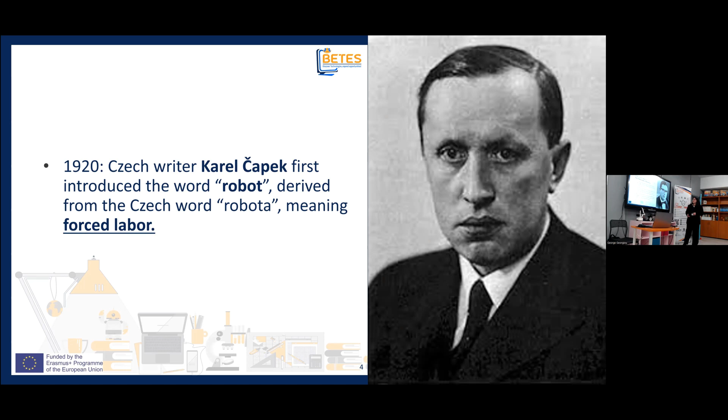The second person, also an author and writer, is Isaac Asimov, who in 1941 introduced the 3 laws of robotics.

The first law is a robot may not injure a human being or, through inaction, allow a human being to come to harm.

The second law is a robot must obey the orders given to it by human beings, except where such orders will conflict with the first law. So they will do whatever we tell them to do unless it will harm a human being.

The third law is a robot must protect its own existence as long as such protection does not conflict with the first or the second law. So it will have a mind of its own, it will protect itself, but again, it will follow the orders and not bring harm to a human.

These obviously were laws made by a writer. It doesn't mean that they are actually applied yet to robots.

Here we can see the 3 big waves of robotics. From 1940 to 1970, we have the initial development of industrial robots. The second wave, we have advances in computing and sensors. And third wave, we have the introduction of artificial intelligence, advanced sensors, and advanced machine learning.

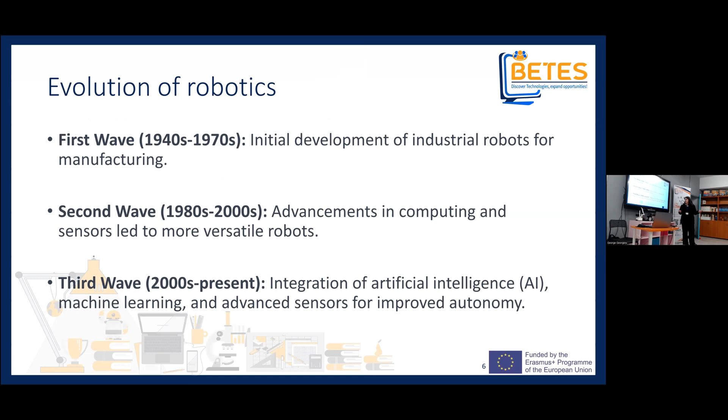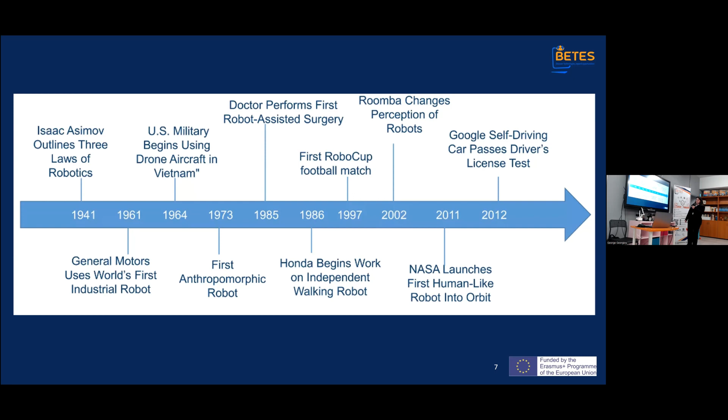So here is a visual representation of the history of robotics. I'm not going to say a lot for this, since I already mentioned the 3 laws.

General Motors uses the world's first industrial robot. This is the Unimate. George Devol and Joseph Engelberger, who is considered the father of robotics, introduced this robot, the first used in an industrial setting, doing die casting in New Jersey.

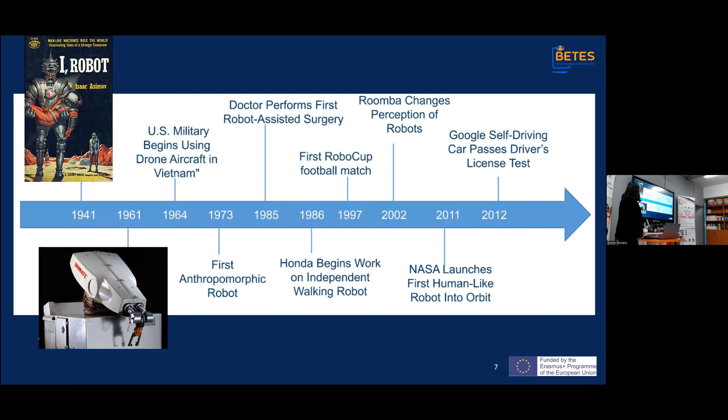Then we have the first unmanned drone that was used, one of the first, during the Vietnam War, if I'm not mistaken. Unmanned means without a pilot, so it went by itself.

Here we have the first anthropomorphic robot, so it resembles human form. This is called Wabot 1, and it had machine vision—well, the first steps of machine vision.

Here we have Puma, that was the first programmable universal machine for assembly, and it was used for surgeries and biopsies.

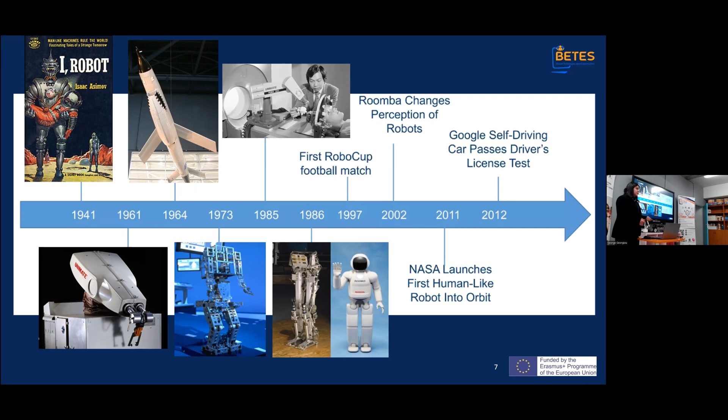In 1986, Honda makes this robot, Asimo, which means advanced step in innovative mobility. They replicated the Wabot robot and wanted to make it more advanced, since the earlier one was not as advanced—it would wobble and fall—so they wanted to make something better.

In 1997, we have the first RoboCup, so you can see mobile robots that play football.

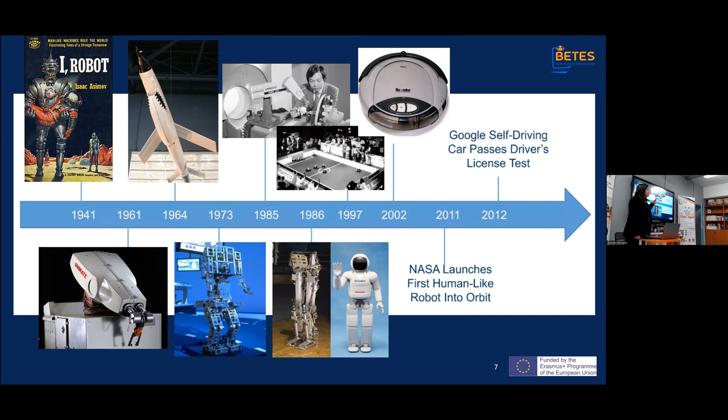Another robot is the robot vacuum. It was introduced in 2002. It's one of the most popular robots, the vacuum robots.

Here we have Robonaut 2, if I'm not mistaken, and it was the first to be launched into space, of course by NASA. It had machine learning, AI.

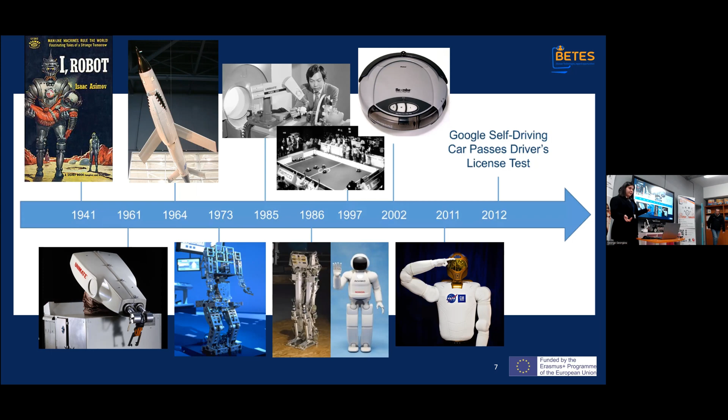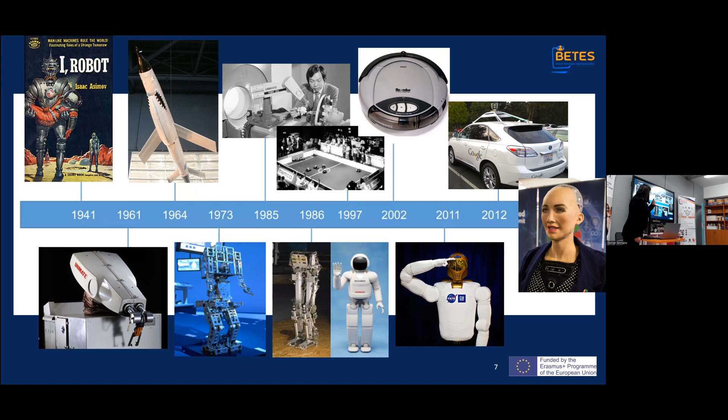And in 2015, Sophia was introduced, one of the most known robots that resembles human features. Actually, something I found out while doing this presentation is that Sophia has citizenship—I think it's in Saudi Arabia—granted in 2017. So that's just something to think about.

Okay, before I tell you the term of the robot and what it does and what it includes, I want you to tell me what you think is a robot and what is not. So if you can scan this QR code, you can answer what you think.

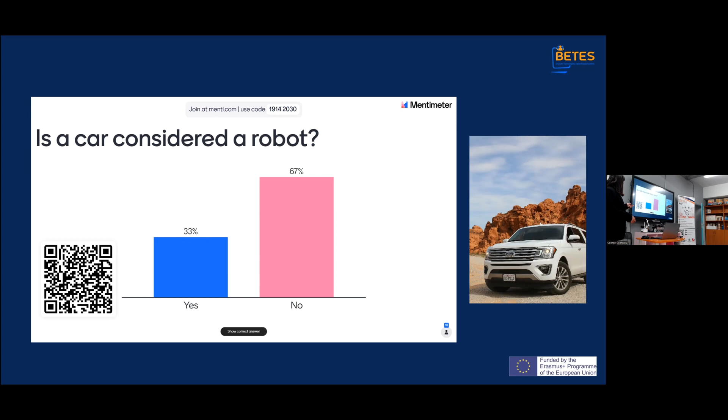What about a washing machine? I mean, they are smart, for sure. Okay, again, I didn't expect so many yes answers. It is not considered a robot. It has programmability, adaptability, it does spin, so it does have rotation, but it doesn't do many tasks. It has to perform many tasks and be able to adapt in an environment, so it does not do that.

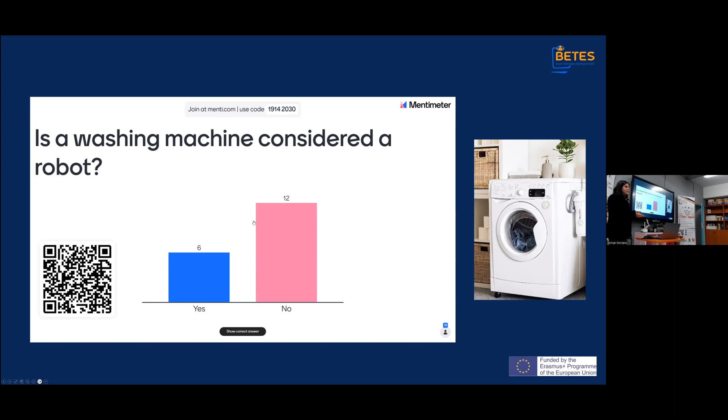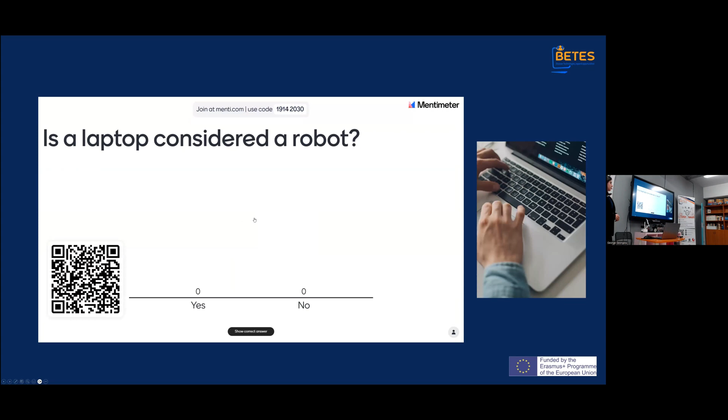Here we have, I think it's very obvious. Okay, I'm glad that there's no more yes in this aspect. It is obvious that it's not a robot. It's programmable, but it does not have an actuator, it doesn't move.

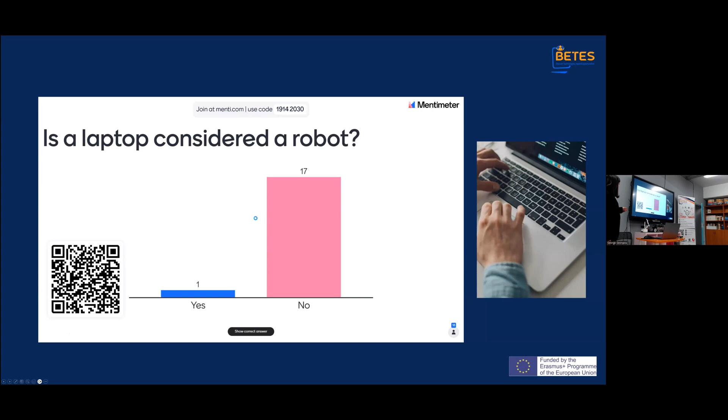Again, this is very obvious, I think. If there's a no answer, I will want the person to explain why not. So be careful. I mean, I did spoil it, but it's very, very obvious. Does someone want to explain to me why it is not considered a robot? Probably not.

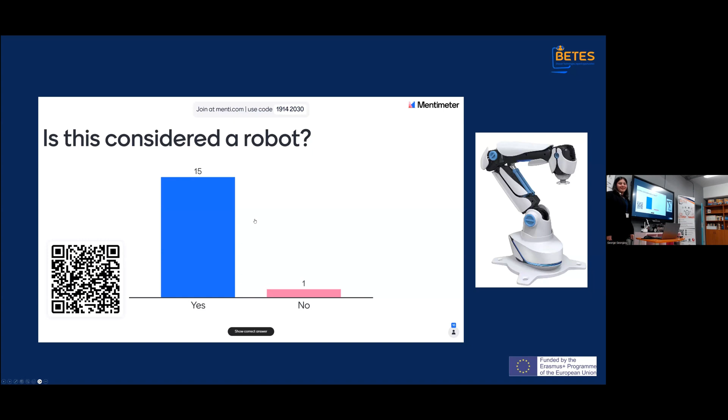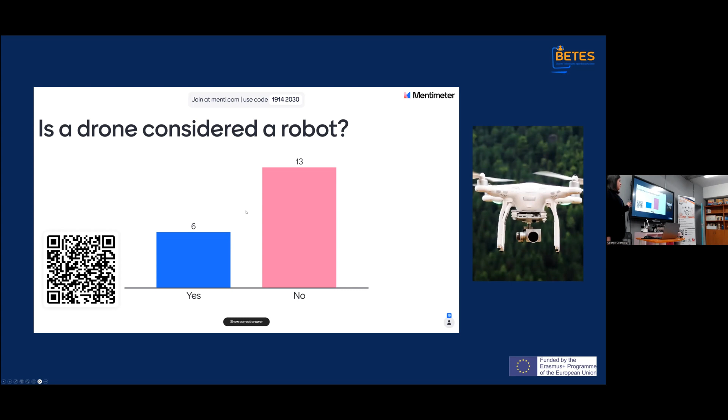We have this, a drone. I just have a couple more. Okay, again, it seems that there's a misconception of what a robot is. Drone actually is maybe kind of a tricky question because it depends on what the drone does and its capabilities, but mostly it has robotic characteristics. I will explain later why. It is a robot, yes.

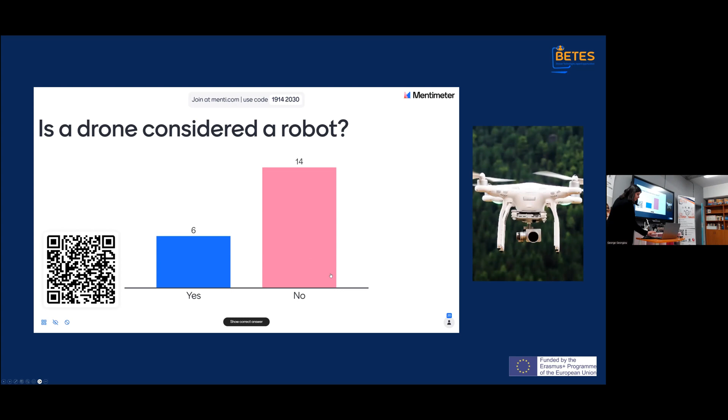I think I have two more. Yes, this another one, promise I'm not gonna make you work later. This is an AGV or an AMV, which is an automated guided vehicle or automated mobile vehicle. The difference is one follows the line and the other one just moves on its own. Yeah, well, I did say that the vacuum is considered a robot, so therefore it is a robot.

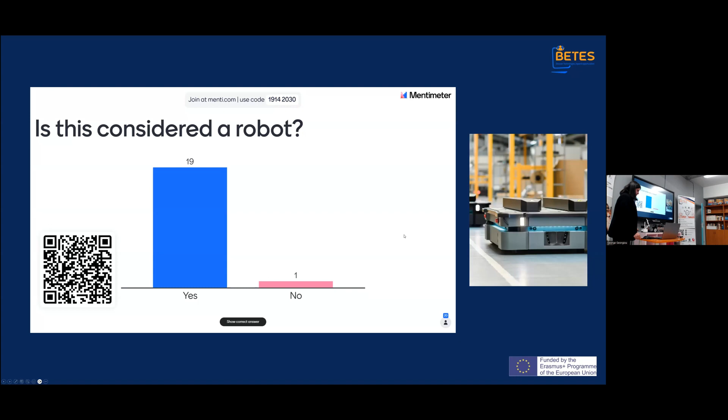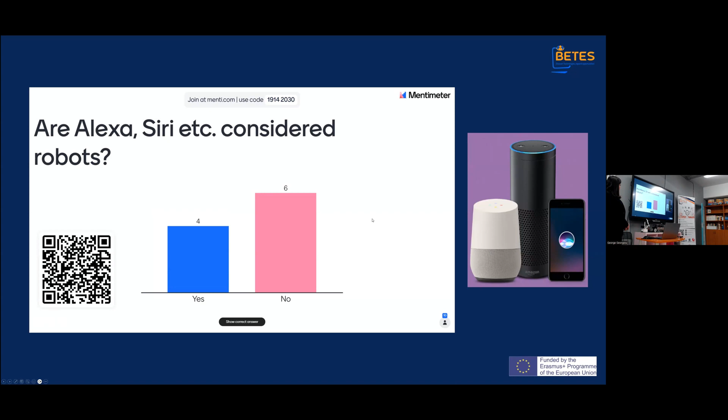And the final one. Okay, well, Siri, Alexa, Amazon Echo, and all of these are called virtual assistants, voice-activated virtual assistants, and they are not considered a robot. They do have robotic characteristics, which is the programmability. They have AI, machine learning, and all those advanced programs and algorithms going on in their microprocessors and such, but they don't do a task. I mean, they do tasks, they help you, they talk to you and so on, but they don't perform or manipulate with the environment. So it is not considered a robot.

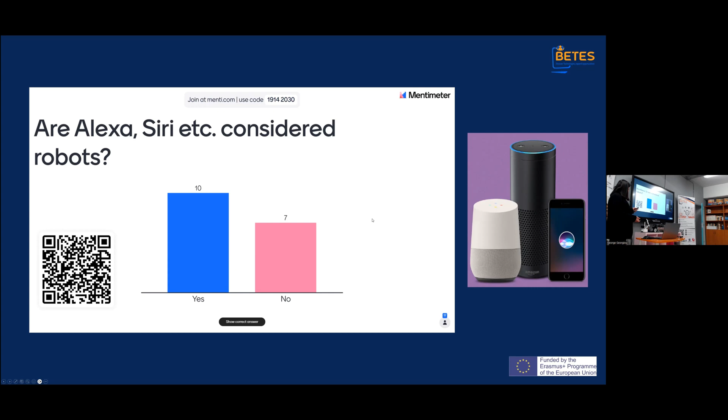Here is another few terms from NASA. It's the same thing: robots are machines, they do jobs, and they work by themselves.

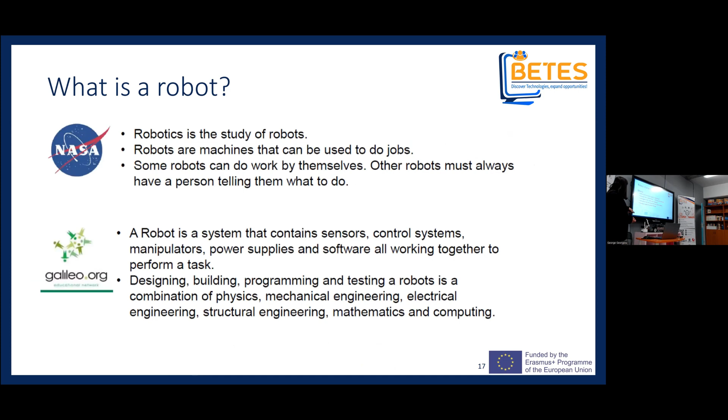Okay, so characteristics. What characteristics are obvious? They have a mechanical body. They have sensors, they're intelligent, and they have energy to supply all of those things.

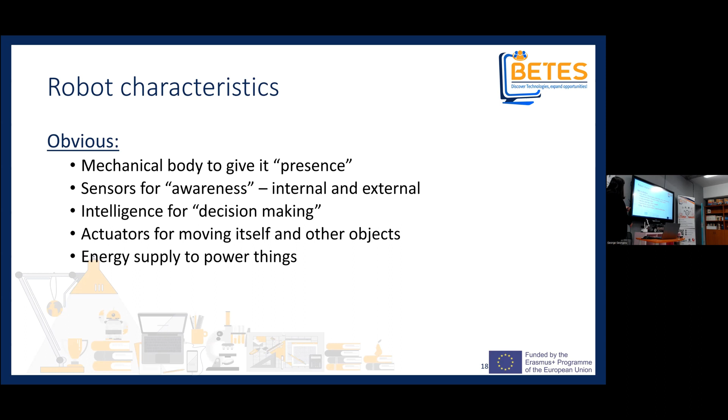What is not obvious is how you use them. Are they semi-autonomous? Are they autonomous? How do they work? How do the actuators move, from kinematics, forwards, inverse? We're gonna cover that later. Are they fixed? Are they moving? How do they move? Is there a pre-planned path? Do they move according to what they see, or does it depend on the robot? And of course, do they have constraints or not? Is it only one? Are there multiple? Are they coordinated?

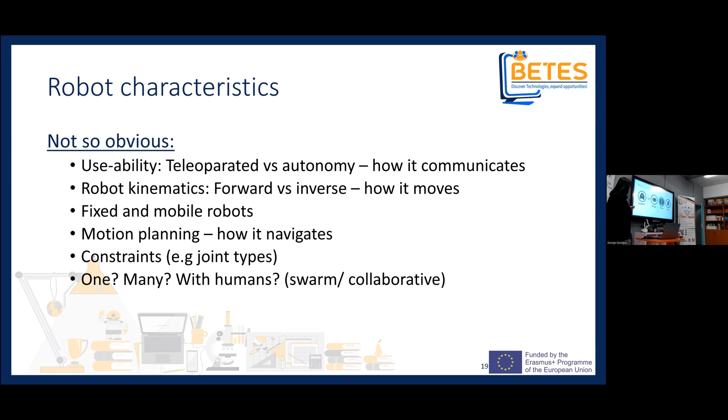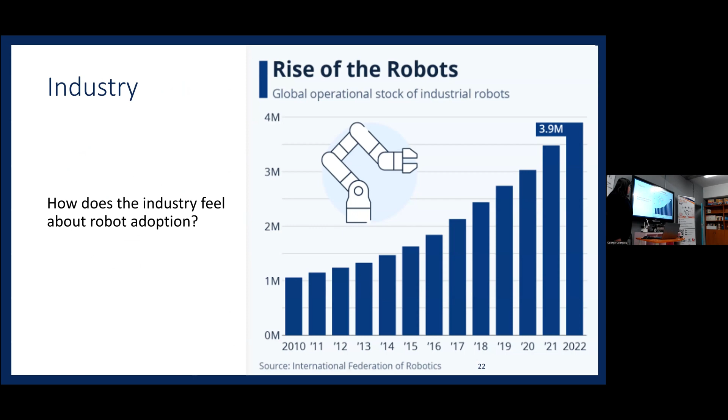There are three major categories: industrial, service robots, and educational robots. Industrial mostly refers to commercial robots, while service robots refer to non-commercial use. We have domestic, social, delivery, medical, military, search and rescue, space. We're gonna look at all of those examples.

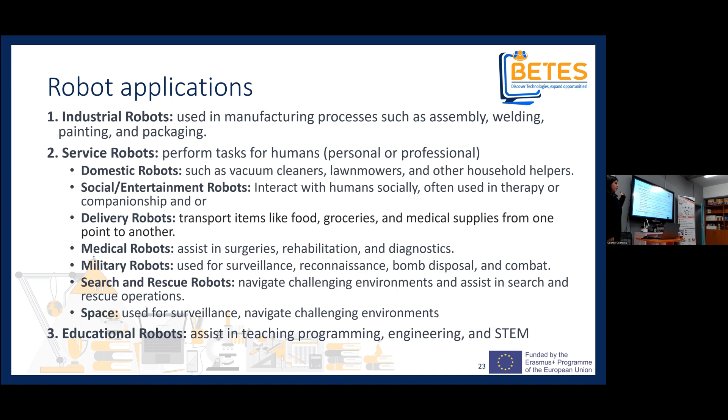Industrial robots are mostly used for these reasons: welding, material handling, and other applications. They increase efficiency and productivity in manufacturing. Of course, a human cannot do prolonged tasks the same way a robot can, and also doesn't have the same strength, obviously.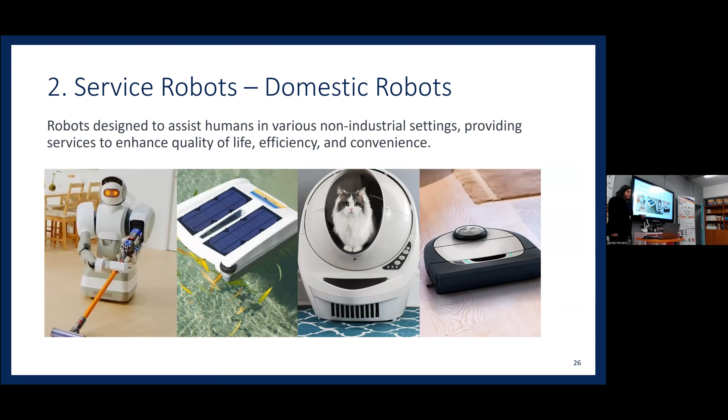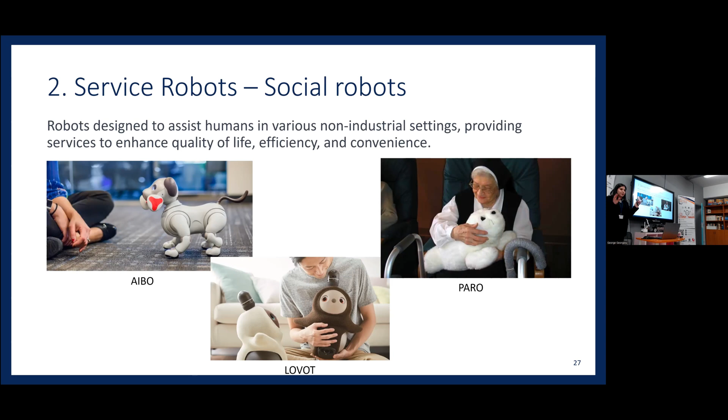They're mostly used for... Paro especially is used for the elderly, for rehabilitation, when they're not allowed to have animals, but animals are known to help with rehabilitation, stress, and so on, so they use something similar. I actually saw that robot in person. It moves, it's a seal, and it does move, its eyes rotate and so on. So it does look very realistic in person.

Pepper is also a companion. It can understand, has AI, has all of those features. It's made by, I think, Aldebaran Robotics, yes.

And Ohmni is a telepresence robot. Of course it's a service robot because it's like a fancy Skype or fancy Zoom - you can actually move the robot and interact. So let's say I wasn't here and a robot will do the presentation, and then it will come to you and speak to you, it will be the same. It was used a lot during COVID in universities that had them, and it's becoming very popular now in universities.

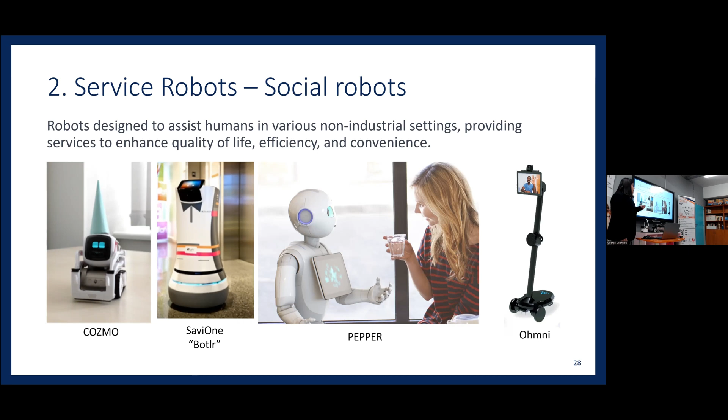We have medical robots. Da Vinci is one of the most popular medical robots, it does surgeries. We have CyberKnife, which does full robotic radiotherapy. And the Xenex robot that sprays disinfectant in the rooms. Again, this was going to be very popular during COVID because the rooms in the hospital needed to be cleaned and sterilized very fast, all of the rooms. So this was one way to do it.

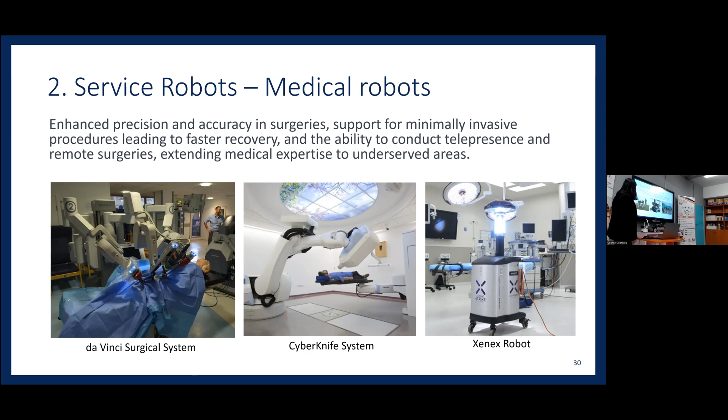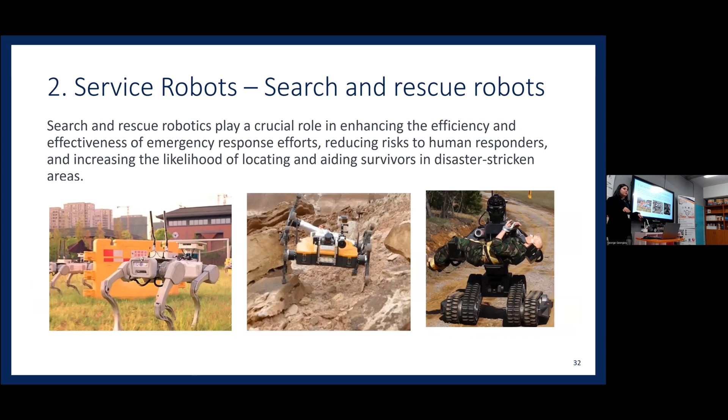You have military robots, search and rescue, which all of these have certain mechanical abilities so they can move around in uneven terrains. And of course the educational robots that are very popular now - it's a new way to learn STEM and explain some technology concepts to students, an easy way to do it. Here in STEM education, that's what they do.

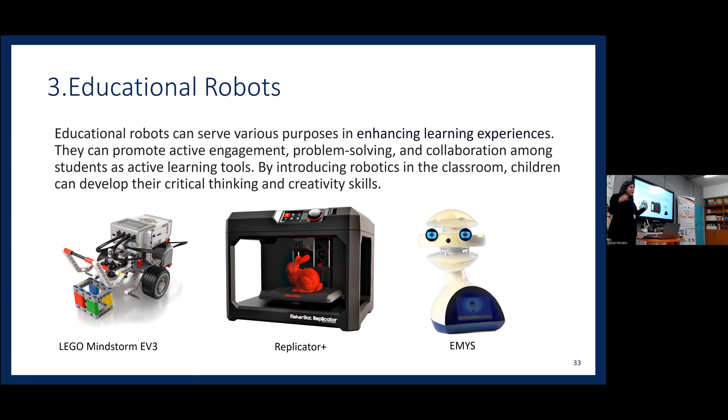People think robots are going to be a problem, that they'll steal their jobs. But as mentioned, it's job displacement, not job taking. A robot helps a human do work, it won't take its job. It introduces more jobs as well, because you need someone to program the robots, a technician to fix it, and so on. So it does create more jobs.

It brings economic growth from increasing productivity and efficiency faster than one person does, and improves quality of life. Most important for me is that it can perform dangerous tasks so humans don't have to.

Let's say for search and rescue, you have a bomb threat. Is a person going to go do it, or are you going to send a robot that you don't care if it doesn't do the job right? You're going to send a robot because it's safer. Or if a room is hazardous, has chemicals and stuff like that, you're going to send a robot to do the task. If it's not a smart robot, you can teleoperate it if full autonomy is difficult, but it's still a better way to do it than putting humans to do it.

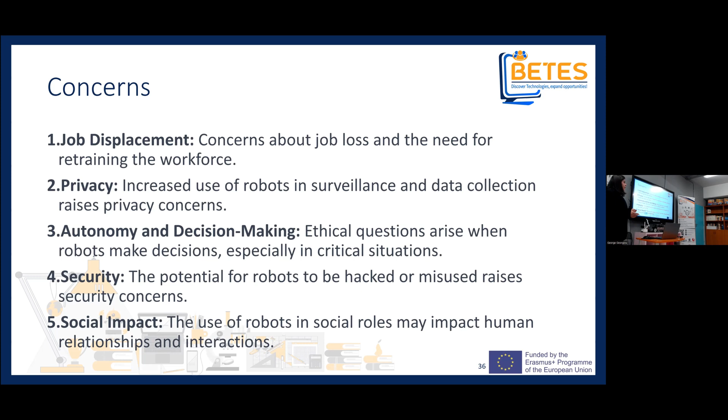Security — if robots are going to be misused, yes, maybe, but again it depends on who programs it and how, so it's not a major concern. And social impact — if it's going to cause problems with human relationships and interactions. Some people are afraid of coming into contact with robots because they're scared of them, but I think we're now in an era that's more accepting than before.

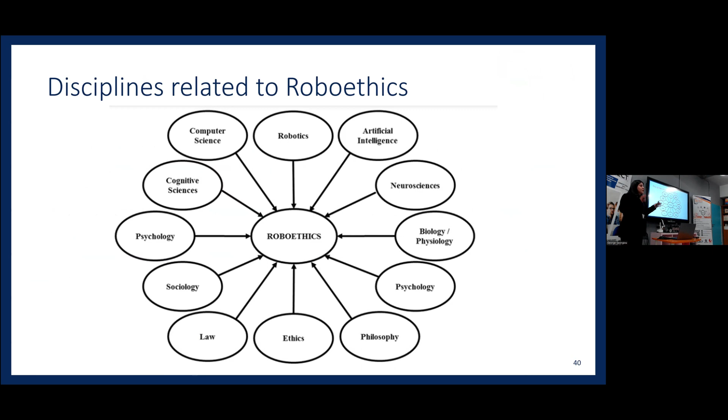Here is roboethics. As I said, it takes into consideration scientific, cultural, and technical tools that will be embedded in robotics, to promote and encourage their development and help prevent misuse against humankind. These are some disciplines taken into consideration: ethics, philosophy, law, sociology, psychology, computer science — all of those things must be considered to make a perfectly safe, or almost perfectly safe, robot, so it won't turn against us. But there's always the possibility, I guess, for it to happen.

Here I'm going to give you two main types of robots: mobile robots, which is obvious — vehicles that move around the environment — and robot manipulators, which look like this. They're fixed-base jointed robots, and they're very popular in the manufacturing industry.

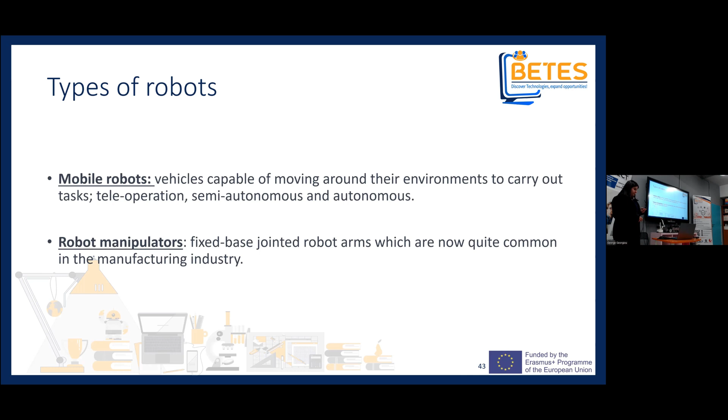For wheeled robots, there are different types of wheels. For flying drones, there are different types too — fixed wing, multiple wings, and hybrid. So depending on the application, you'll have to choose what's better for you. If it's high payload, then maybe you'll choose the one with more wings, more rotors.

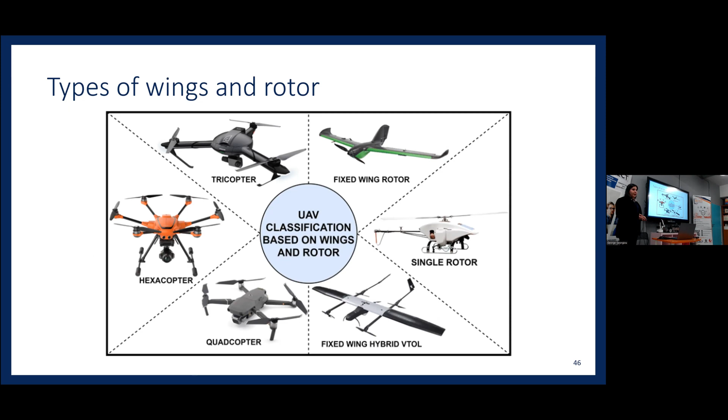And now about the robot manipulator. It has actuators, sensors, and a structural component. The structural component has rigid bodies and articulations. Rigid bodies are the links, so it's this part here. And the articulations are the joints, which is the part that moves it. I'll explain it a bit later. It also has the end effector, which is the end. It can be a gripper, it can be so many things, it can actually be a paint gun, so it depends on the application.

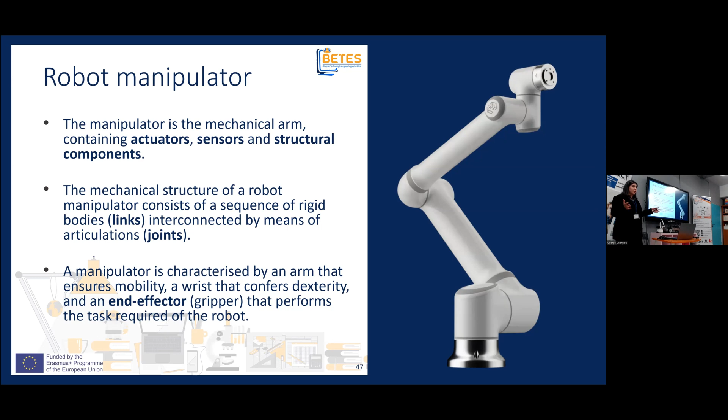Here it shows why it's called robotic arm, or robotic manipulator. It is similar to a human arm. As we have joints, they also have joints, and this is how it looks like. This is the link, and this here is the joint. This part here is the end effector, and this is the base.

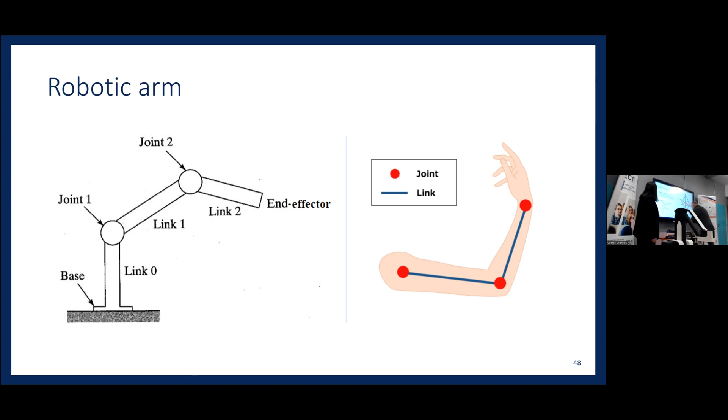So how does it move? It has degrees of freedom. What are degrees of freedom? They are the number of independent variables that define the possible positions or motions. There are two types of degrees of freedom: translational and rotational. So it's either moving, rotating, or translating.

So how many degrees of freedom are shown here in the image? How many degrees of freedom in that picture? There is a wrong answer, which is 'I don't know,' and the right answer, which is 6 degrees of freedom - I just actually spoiled the question for you. It's 6 degrees. Not all robots have all 6. As I said, wheeled robots have mostly 2, and a drone has 3, and it goes on.

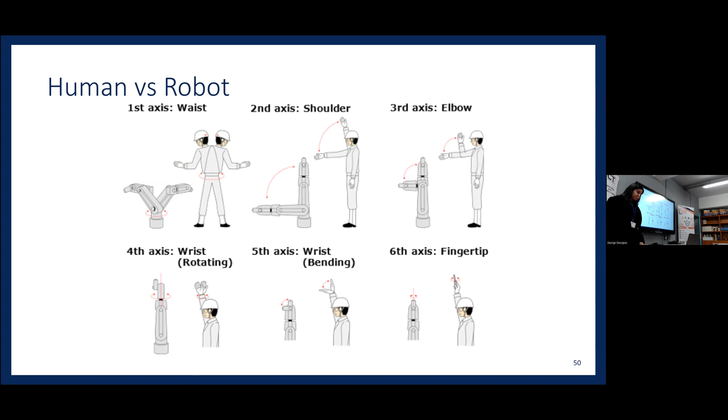How do they move? As I said, they are rotating and translating. The rotating is the revolute joint, and the prismatic joint is the translation, so it goes forward and backwards. We have other joints depending on the application you have to choose one. The helical has only 1 degree and it's rotating. The cylindrical has 2 degrees of freedom, rotating and translating, so it goes up. The universal has 2 degrees of rotation, and the spherical has 3 degrees of rotation.

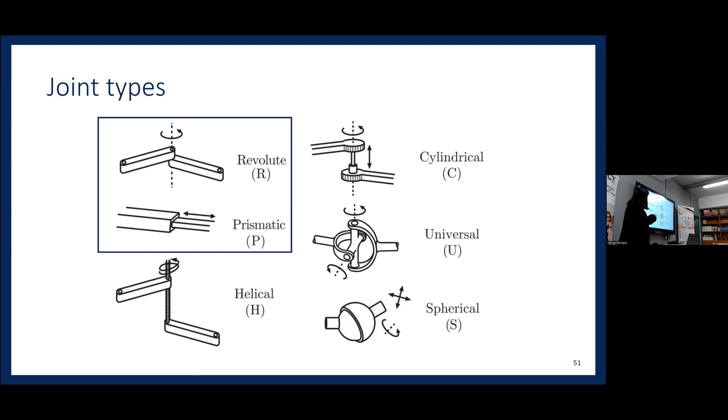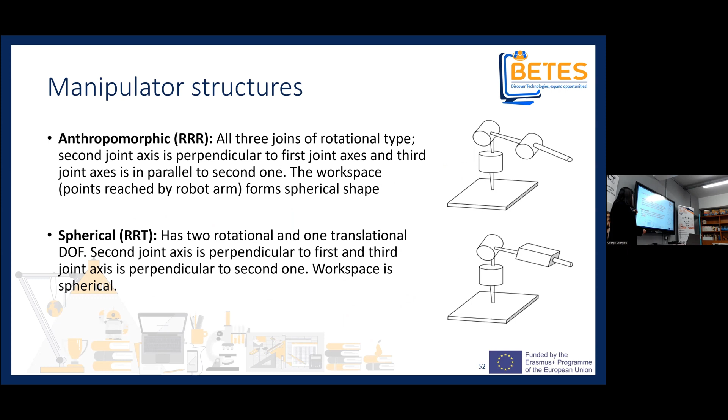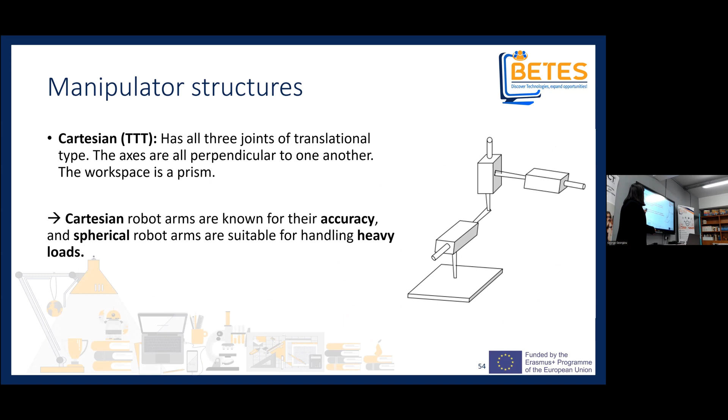We also have different structures, so how do we combine all of those joints? We have anthropomorphic, which is 3 rotational joints; the spherical, 2 rotational, 1 translational. We have SCARA, the selective compliant articulated robot for assembly, which has 2 rotational, 1 translational. The cylindrical robot arm is rotational-translational, and Cartesian is all translational. This has very high accuracy, and the spherical is very good with heavy loads.

And here we can see 6 degrees of freedom. As I said, it's the highest possible that is used now. You could have 7 degrees of freedom, but that would be redundant since 6 revolute joints create the widest range of motion for a robotic arm. You can add a 7th and an 8th, but then you'll have a more complex system with no extra value.

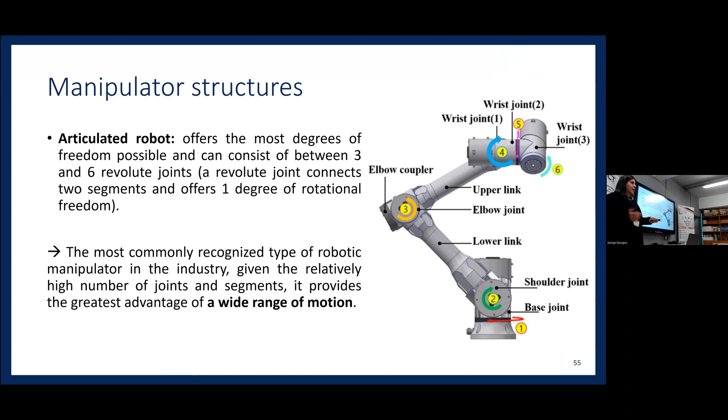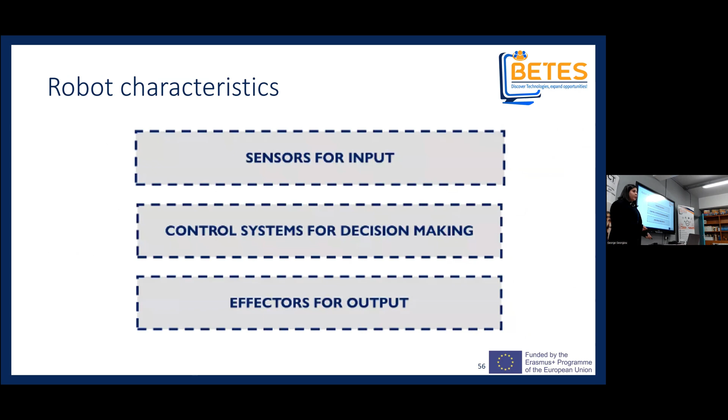As I mentioned before, robot characteristics have sensors for input, control systems for decision-making, and effectors for output. So I'm gonna explain more about the sensors now. Sensors are devices that enable robots to perceive information. Depending on the application, you get different data - are you having optical sensors? Do you have touch sensors?

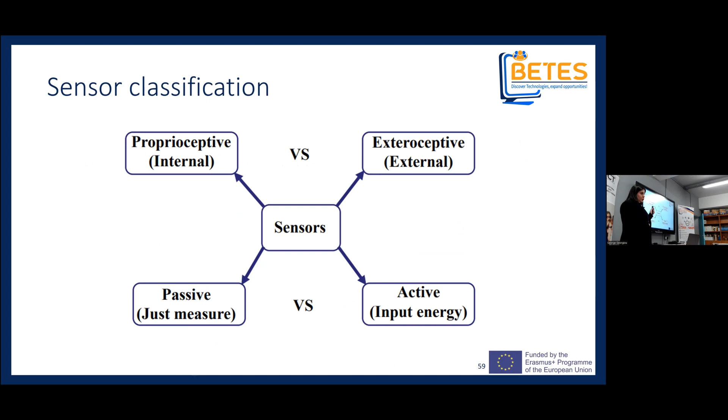They're different types: internal, external, passive, and active. I'm not gonna go into much detail for this, but we're gonna see later some examples of sensors and it will explain which is which. We also have different inputs - is it gonna be a digital sensor that gives 0 and 1, true or false, or is it gonna be an analog sensor that gives a range of values?

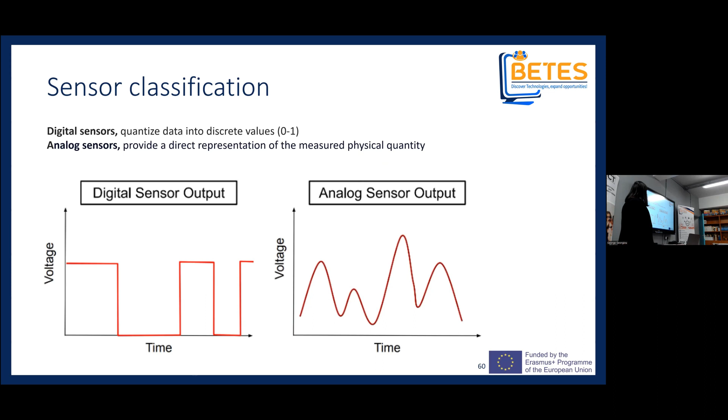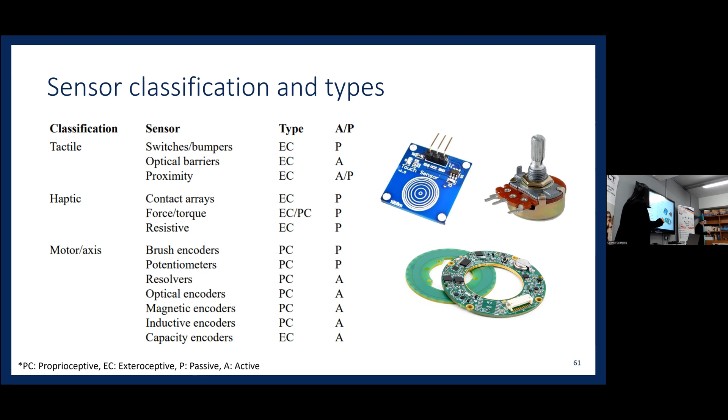Here we have some sensors, tactile, motor, and you can see what type they are. EC is external and PC is internal, and P is for passive and A is for active. We have switches for, well, haptic and tactile are pretty much the same thing - tactile is a part of haptic. Haptic also has kinesthetic, which is a bit different, more advanced than touch. We also have sensors for speed and identification.

So how do we choose which sensors to put in a robot? It depends on the application, but do we want to know the robot's location as well?

Or do we want it to just measure, let's say we have an object, is it there, is it not? Do I want to know where is the robotic arm? It will affect the application.

So very good sensors for localization are GPS, of course, for outside, laser ranging, radar and LiDAR. LiDAR is the most popular in robotics for localization.

So these robots, the robotic vacuums, as I mentioned, they can perceive the environment, they can see if there are objects and they are avoiding them. So you need, of course, to know where the robot is in this application.

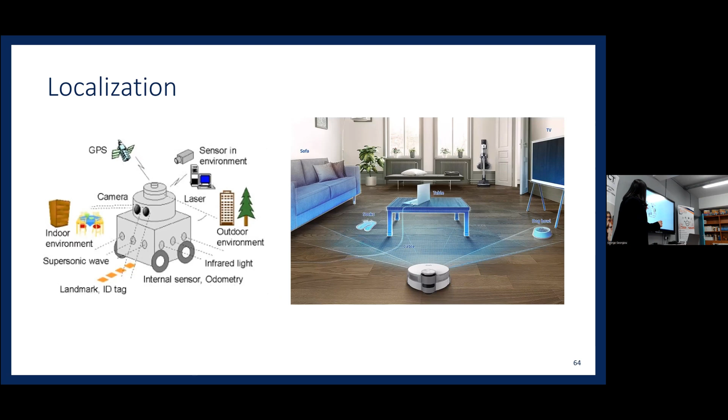And if I go back, here are some more sensors. These are more for environmental applications.

So how do they perceive this information? The sensor gets the data, it extracts some features, so it reduces noise, it does some analysis. And if it has a model, it updates that model in order to use a dynamic model to predict how it will change. I will explain it a bit more later.

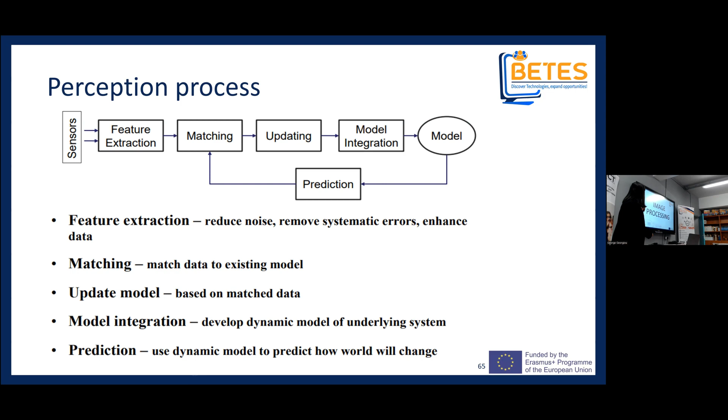And image processing, why is it needed? If we're using a camera, image processing is very important. Image processing is a subclass of signal processing, specifically for pictures. It has image compression, image enhancement, and image understanding.

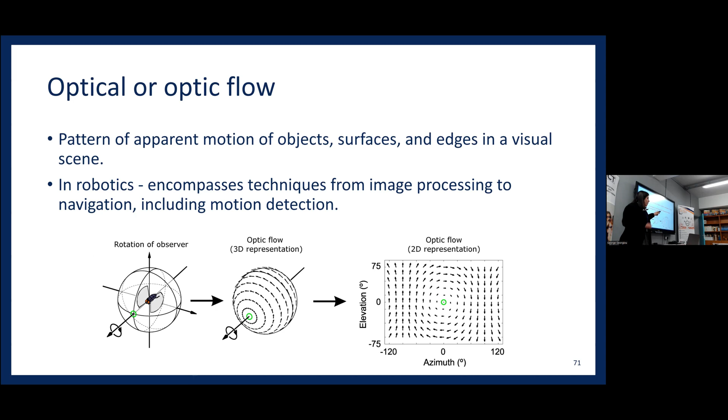I will give you an easier example, this one. So this is the mouse, it has optical flow. The mouse has been in use for how many years, Mr. George?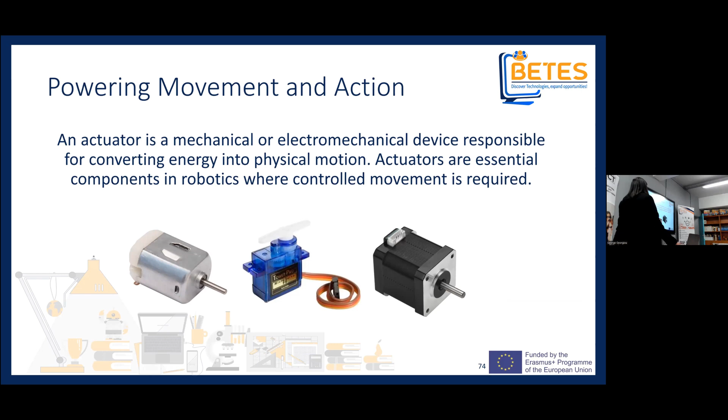Okay, so we talked about the sensors. Now we have to talk about the actuators. What actuators am I going to use? Again, depends on the application.

But there are two types, linear and rotary. So it's what I'll explain later, it's rotating or translating. That particular one actually does both.

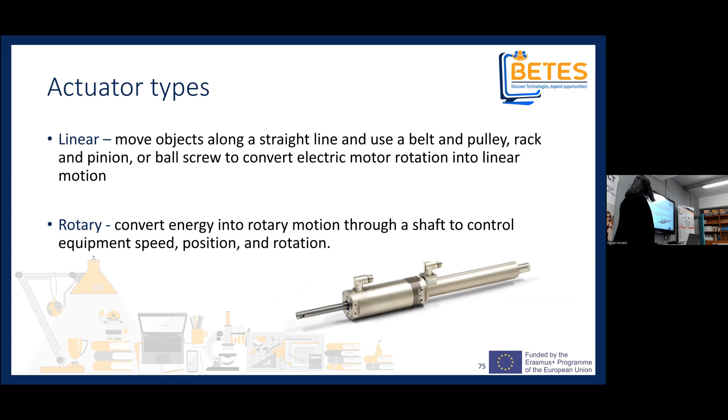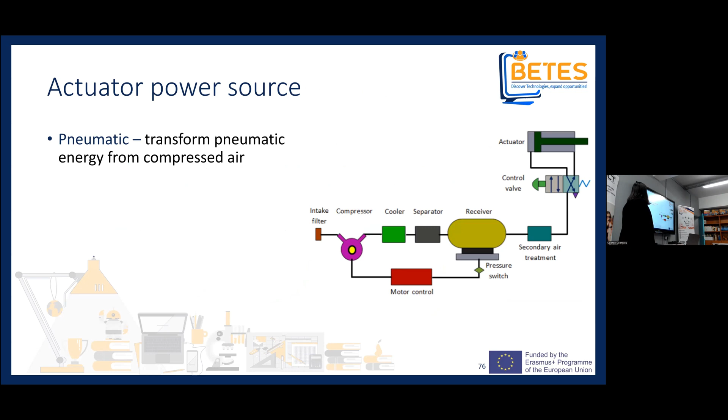We have different power sources. So we have pneumatic that work with air. We have hydraulic that work with water. So the water pressure does the actuation, or the pneumatic air does the actuation, or the most popular ones are the electromagnetic ones that transform electric energy to mechanical.

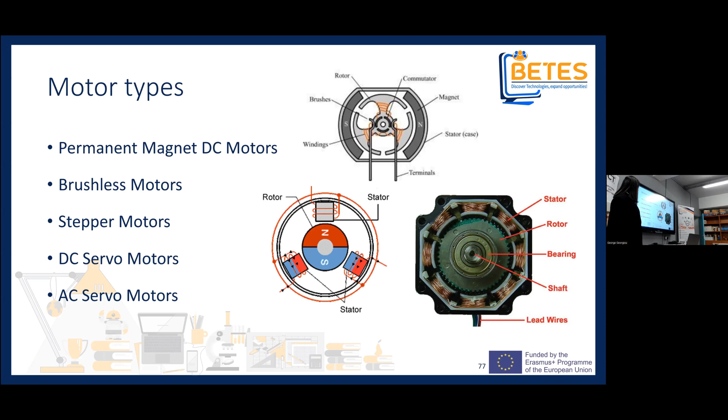And here are some examples: DC motors, brushless, stepper motors, servo motors. Again, if you want to have higher torque, or if you are having high payload, you're not going to use servo, you're going to use one of those DC motors. But the servo motors are very popular in robotics.

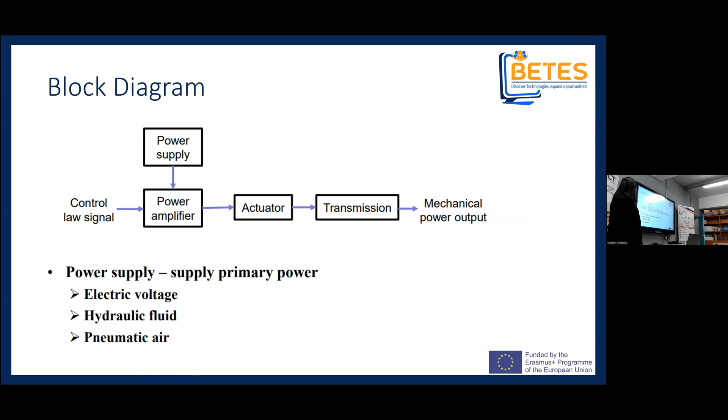Here I'm going to introduce my favorite part about robotics: kinematics and dynamics. You want to know how the robot is going to move, not just forward or side to side, but how does it move. This is a whole chapter of science, with a lot of maths and physics involved.

Kinematics is the study of motion of mechanical points, bodies, and systems without consideration of their associated physical properties and the forces acting on them. So in kinematics, you don't care about the forces, what you care about is the movement.

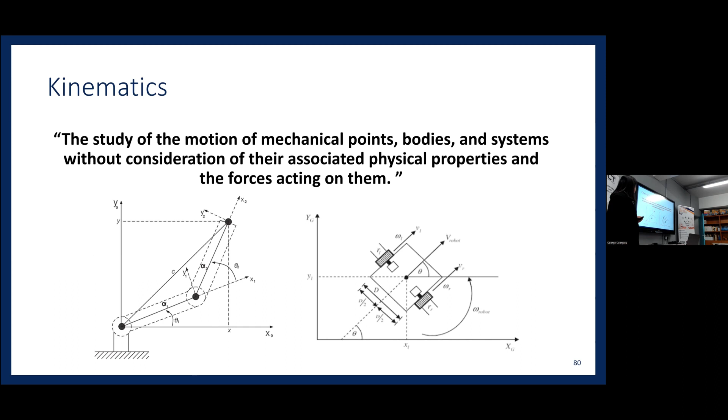Here is a robot arm, and that's a car, because this applies to both types of robots. Here is the forward and the inverse kinematics. I'm going to use the manipulator example as it's a bit easier. Forward kinematics is when you know the position of the joints and you want to find out.

So you know where this is, you know the angles of this and this, and you want to calculate the angle of this one. And the inverse kinematics is you know where the end effector is, and you want to calculate where this is and where this is going to be.

This is for a 3-degree robot, which might not be that hard, but for a 6-degree robot it is very hard to calculate. You have matrices and all that math going on to try and figure them out.

You also have differential and inverse differential kinematics. With differential kinematics, you know the joint velocities and you want to find the velocity of the end effector. With the inverse, you know the velocity of the end effector and you want to find out the velocity of the joints.

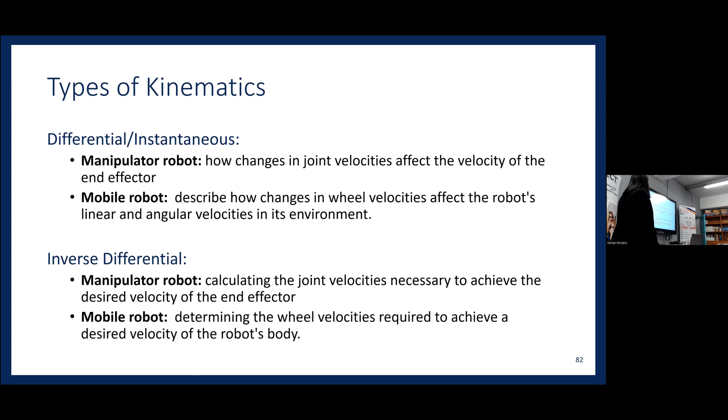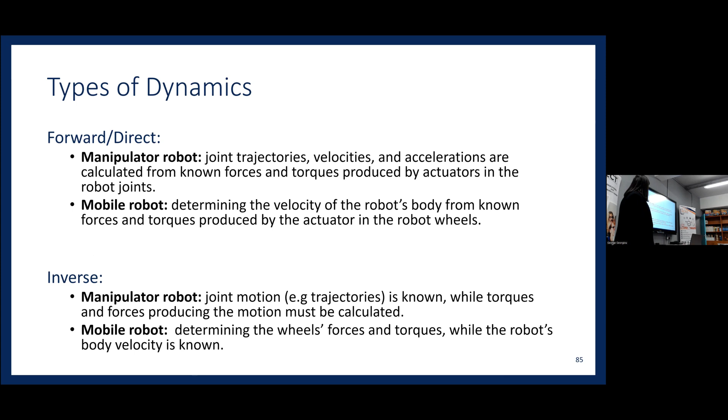This is what they look like. Of course, I'm not going to go into detail. All of this is translated into matrices, and you have like 5 pages worth of calculations going on to figure it out.

This is very useful when you're building a robot. If you want the end effector to perform a specific task, it's not just going to move from one point to another—you have to calculate how it's going to move. So what is the easiest, or let's say the least complex way, to go from this point to this point?

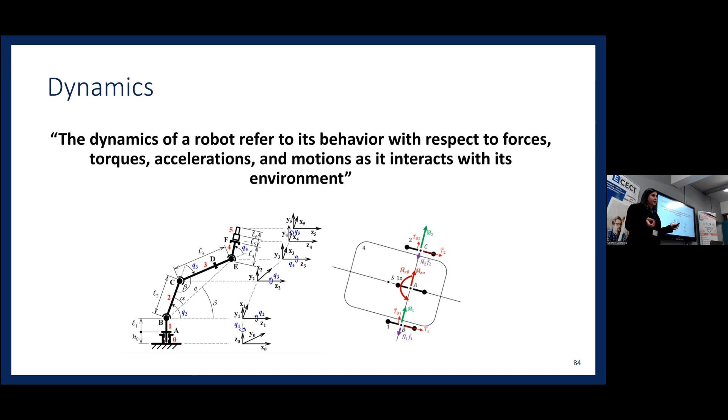This is static balance, when it has zero velocity and acceleration. So a robot, like me standing right now, has zero velocity, and my center point, the center of mass, is within my two legs, so I won't fall over.

We also have dynamic balance, which takes into consideration the fact that the robot is walking, so it's a bit more complex. You have to learn about the zero movement point, which is where the sum of the horizontal rotation momentums of the gravitational and dynamic forces is zero. In order for it to move, that zero movement point must again be within the support polygon.

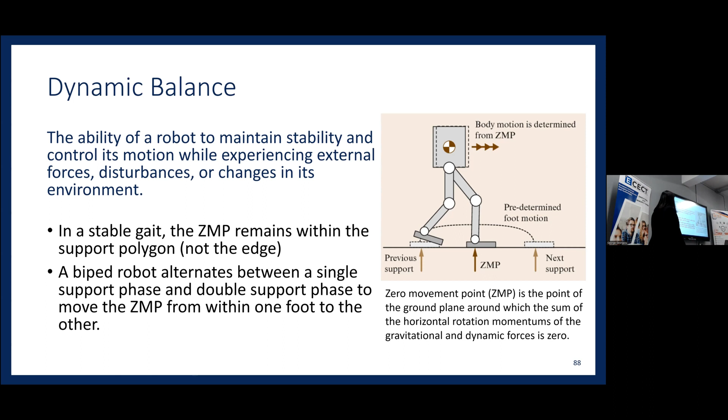The last thing is trajectory and path planning. Path is the ordered locus of points in space that a robot will follow, while trajectory is the path on which timing is important. So if I have 3 points, am I going to go exactly through those points because it's my path, or will I go a bit differently just to reduce the time?